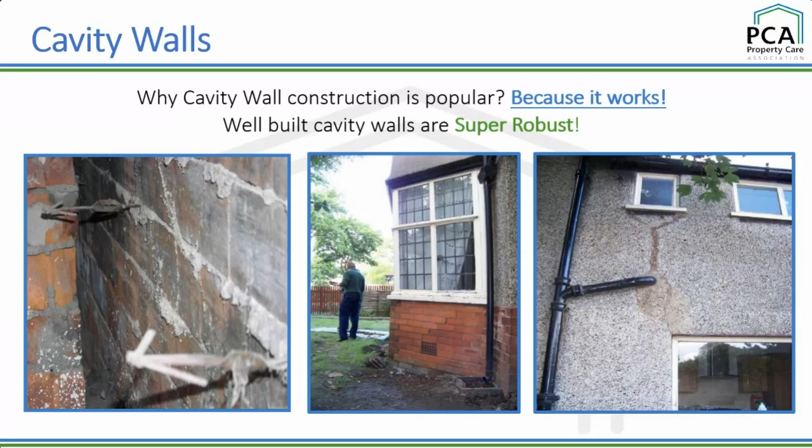But despite all of that, it was dry on the inside. And that's because cavity wall construction is super robust. It really does work. It's fantastic. It's stood the test of time. And I believe it is the Garden Village. Yes, well spotted. But more curiously, has anyone seen these types of tie before? Very unusual. But rat trap we'll get onto in a minute, Les, so don't you worry about that.

But moving on, I've said that we've been using cavity wall as our primary form of construction for the last 100 years. But what's the earliest examples that you guys are aware of? This is throwing it open to conversation in the comments section, really. So what's the earliest example that you know of, that you've heard of? Let's have some comments coming in. We certainly know there's some examples before the 1920s.

Is there a delay on the comment section here? No one wants to talk to me this morning. Well, come on. 1900, yeah, okay. Yeah, just to let you know, James, I think there's just a wee bit of a lag. 1870s. There we are. We've got a few coming in now.

Real County, 1819, 1890. Yeah, so we're all in that sort of similar ballpark, aren't we?

1890. Well, I'm going to talk about my good mate, Marcus Vitruvius Pollio. A bit of a cruel question, because I don't suppose many of us look at Roman architecture on a daily basis. But my mate Vitruvius, and you'll start to realise I'm a bit of a fanboy for him, he was just a bit of an all-round genius. Military commander, Roman architect, and he wrote this, the Ten Books on Architecture.

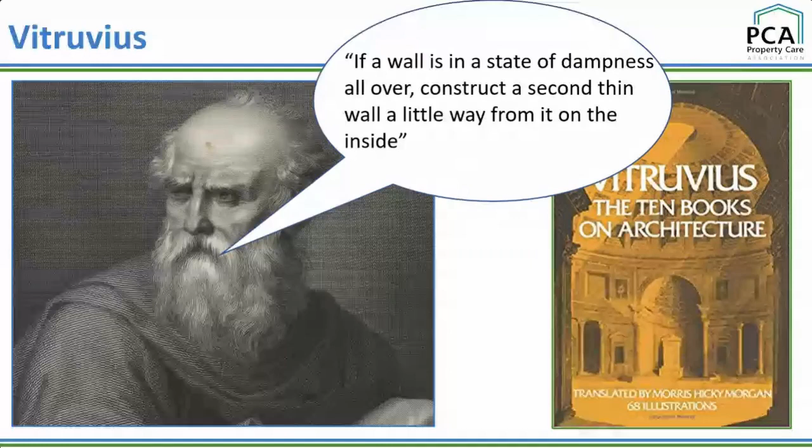So, didn't take long to carry on. Just a quick word to the wise, really, and I know Les has mentioned it previously.

Identification of cavity walls. It might seem obvious if you've got a stretcher bond, it'd be fairly straightforward - you're either at 4.5 or you've got a cavity wall. But don't be deceived, particularly with headers, for several reasons. So you've got that diagram in the bottom right corner there.

That's from Gwilt's Encyclopedia of Architecture from 1899. You can see you've got these quite ornate type bricks used for an early form of tie, essentially to keep those two leaves together. But from the outside, you would be quite easily forgiven for thinking it was a solid wall. Same with the one on the left.

This is actually from the London bylaws in the 1920s. What that advocates is building essentially a solid wall, having the cavity behind that, and then having a 4.5-inch leaf behind that. So ultimately, don't be deceived by headers. The best way of always checking is to do the measuring - check the depth of the wall.

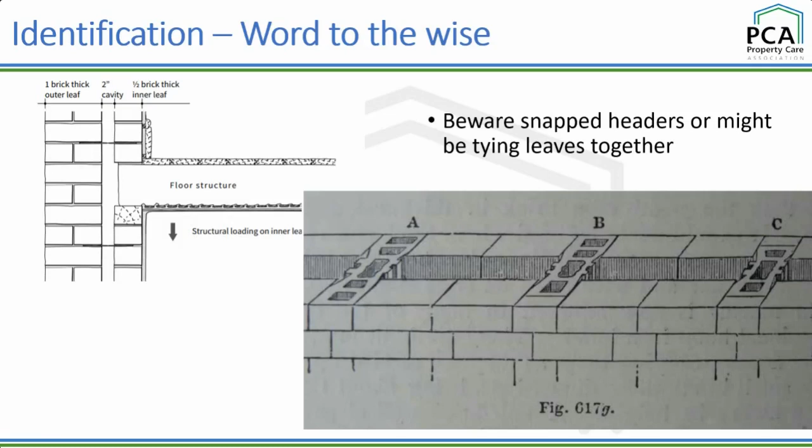You know, don't want to teach Granny to suck eggs. John's mentioned that, yeah, quite often comes about, and it was advocated in the London bylaws, so that's why - make sure you measure. Absolutely, it's a gospel way, you've got to do it. So that's a bit of context, a bit of what we're looking at, bit on cavity walls.

But that happened due to one small omission, and the one small omission on that was it omitted wall ties. No wall ties had been put into that wall. If you think about it, that's due to the slenderness of a 4.5-inch wall. If you put it up and it's not linked to the supporting structure where there's return walls or internal walls to strengthen it, there is very little strength there.

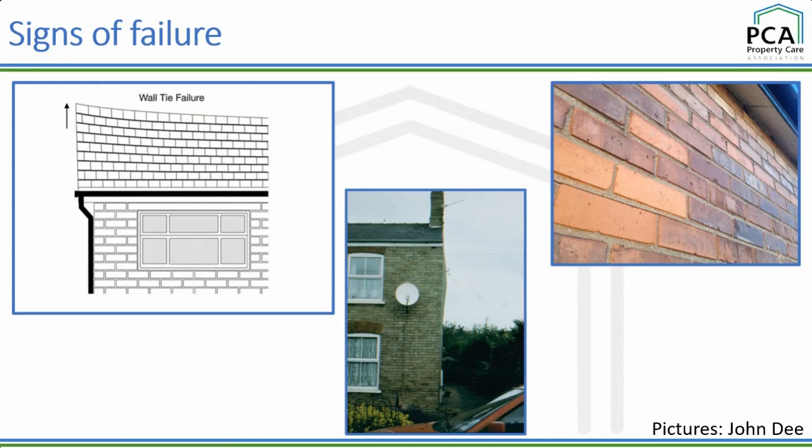One thing I also wanted to touch on, which I did allude to briefly when we did the damp control webinar a couple of weeks ago, is you've got all these ties, and if you look at the design of all these ties, they've all got one feature on them, which is some form of damp control. You've either got the rubber beads, or the twist, something there to drip water, to make sure water does not run across that tie from the outer leaf to the inner leaf and dampness manifests itself internally. It's meant to be dropping water into the cavity.

So there is some form of water control - the cavity is there for water control essentially, and that feature is there for it to discharge water into the void.

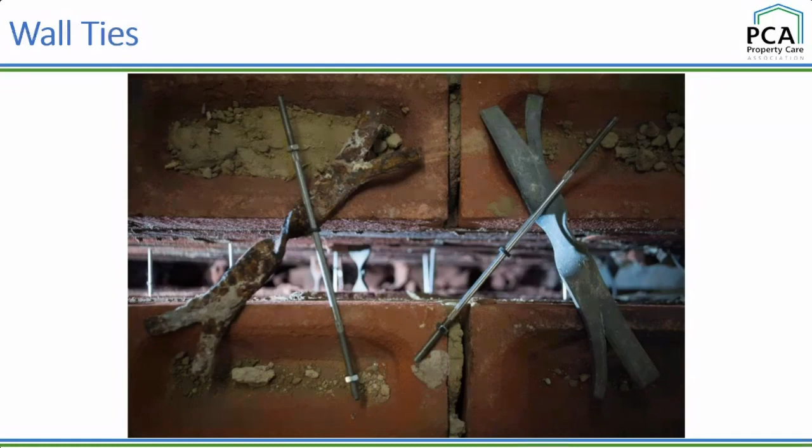So I think cavity trays are another form of moisture control within cavities that are often overlooked and can be responsible for moisture building up if not looked at properly.

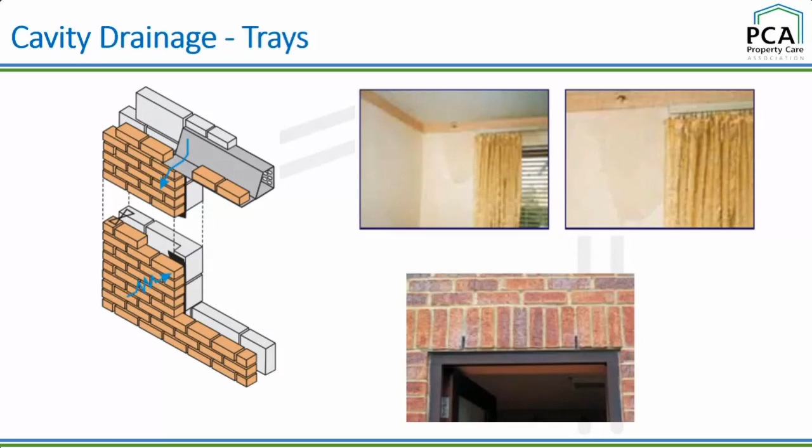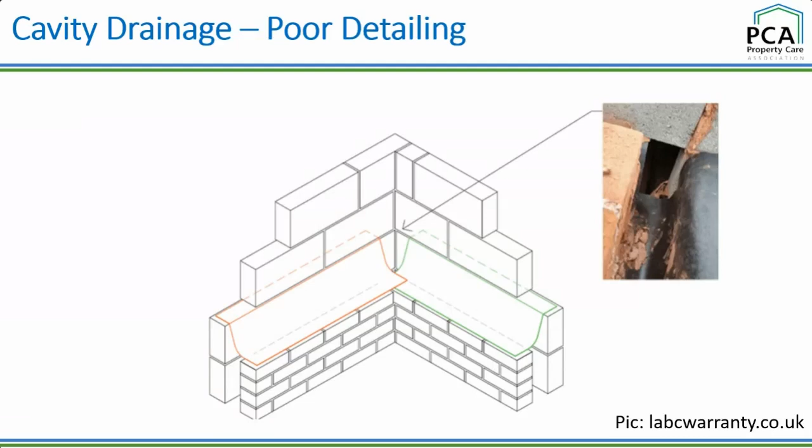And again, that's from LABC documents as well. So talking about window openings, things like that - lintels, another important thing.

You've got a lintel that's straddled across the cavity. It's naturally going to be a few degrees colder as well. So if you're doing your survey, you've got to bear in mind that you've got an inherent defect there.

So if you're out there doing your survey and you're lucky enough to have a thermal imaging camera, you should be able to pick up on something like this if you've got a concrete lintel going across the two. But if not, you can still do similar things with a simple surface thermometer and check above window lintels for temperature differentials to see if there's an inherent built-in defect there as well.

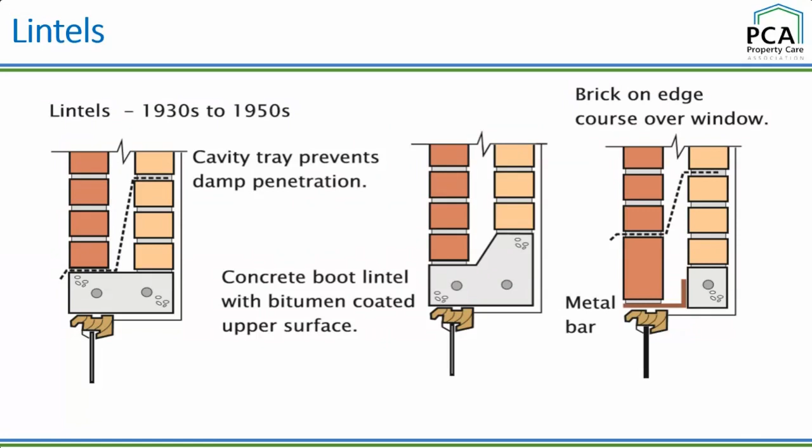So that's a brief overview on inherent design features. Let's jump forward a few slides. So that's a lot about the inherent defects within the structures, as it were.

But what we've also got to bear in mind is that we've also changed a lot of our construction as well, particularly cavity walls. And I'm going to put a big caveat in here, because you get quite a few people that are quite anti-cavity wall insulation, and I don't see myself sitting in that camp by any means. Actually, I think there is a huge move towards being more carbon neutral at the moment, and I think rightly so, and that's something we need to embrace.

But part of embracing that, if we're ever to get anywhere near our carbon neutral aspirations, we need to look at our existing housing stock. Now, our existing housing stock is quite old - the vast majority of it, over 85%, is over 20 years old. And that needs to be improved in terms of thermal efficiency. Cavity wall insulation provides one of the most cost-effective ways of improving the thermal efficiency of a building.

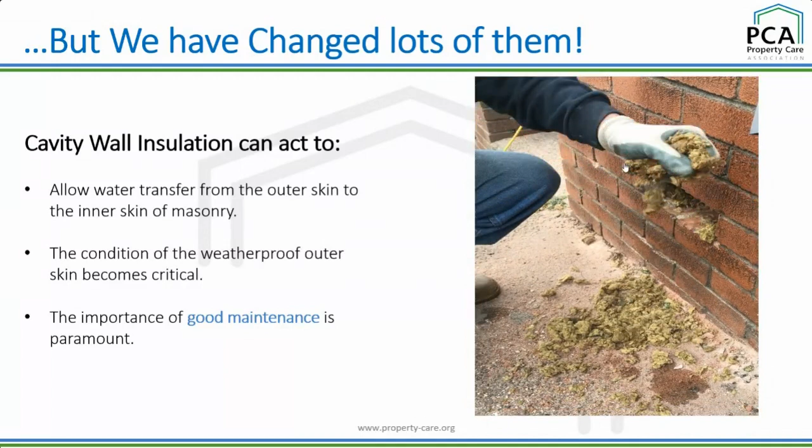Now, hopefully you should have another little video now. So this is a result of a gutter leak. If you start looking at this, what's the cost of a routine gutter leak? Hopefully it should be picked up as part of your routine maintenance. If you're doing your routine maintenance, you should be checking your guttering once a year or whatever, and hopefully the cost of that repair should be free. But in this instance...

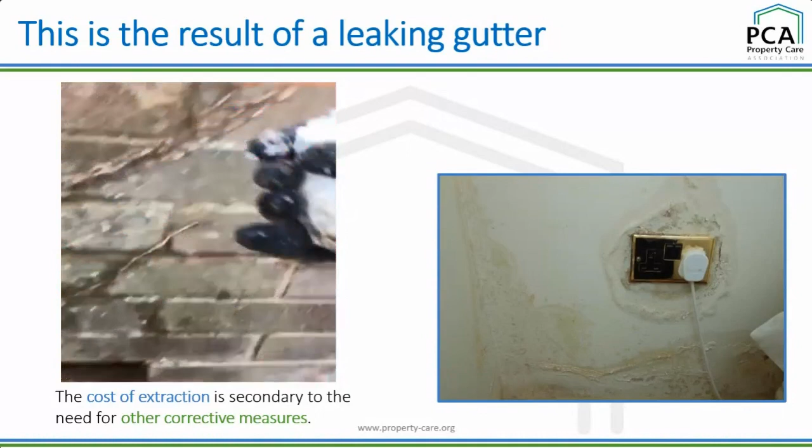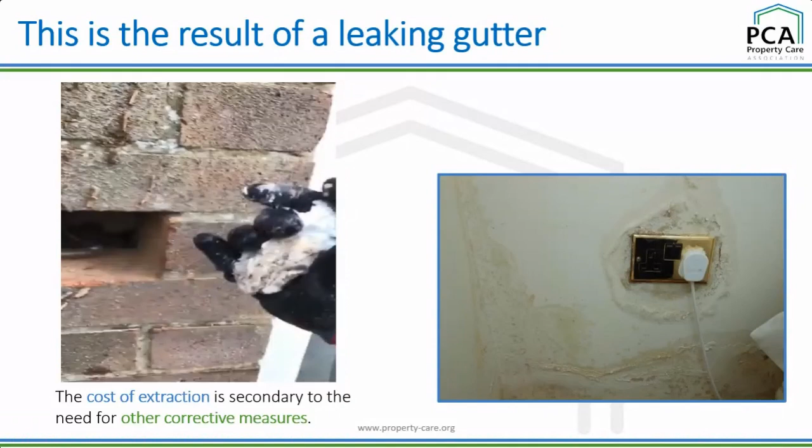You've got to start considering the cost of the extraction of the insulation material. You've then got to start looking at the cost of the replastering as a result of that. You're also then going to need an electrician to check out any of the electrics to make sure they're still safe and sound. You would then need to consider any built-in timbers as well, so there's an extra trade there, and probably a plasterer is going to need to come in as well - another trade. And then you've got your wall ties that may potentially have been affected as well. So something that ultimately should have been picked up during routine maintenance and would hopefully essentially be a free fix - the cost has gone up exponentially. This is why it's fundamentally important to appreciate that cavity wall insulation will change the way that wall works, and the importance of good maintenance.

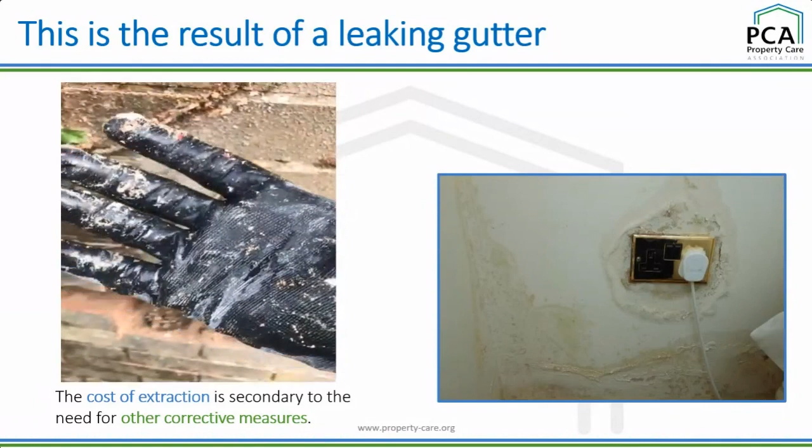So that's where the majority of claims come from.

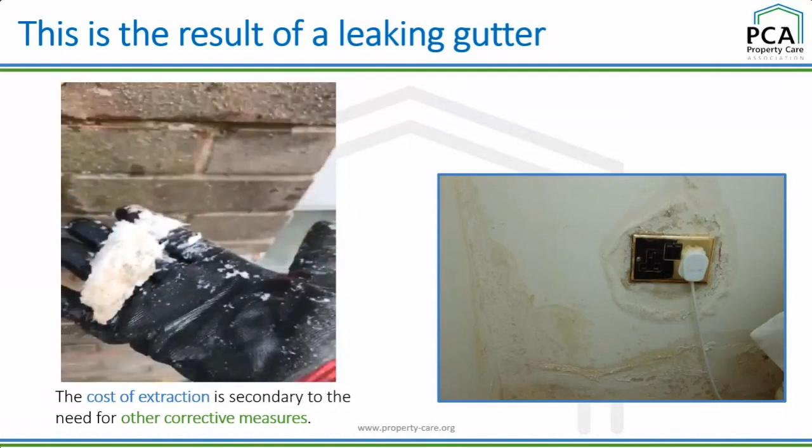But how would you distinguish between rainwater penetration and internal condensation and mold growth problems? For my mind, the only way you're really going to get a positive diagnosis is you could try an endoscope, but I don't think you'll tell much from physical appearance. I think you need to do what's happened in this instance, and remove a brick to get your hands on some insulation. If the insulation has got wet through rainwater penetration, you're going to see it's wet, you're going to see there's some problems.

Just a bit on the main types of cavity wall insulation then. You've got your expanded polystyrene, which you can see there, and then you've got your mineral wool as well. They're your two main types that you're likely to come across.

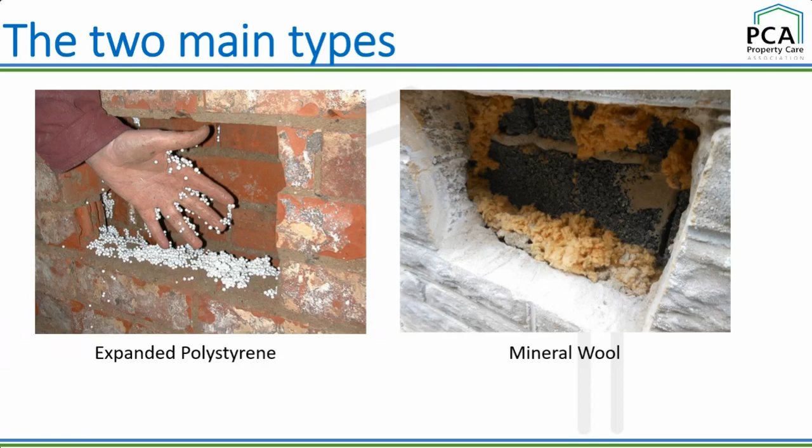Both will allow moisture to get across the void. Mineral wool will act more like a sponge, and for my mind, it will hold more moisture. The other thing you've got to bear in mind with mineral wool is that once it gets wet, it's going to get heavier. When it gets heavier, it's going to drop. When it drops, not only are you going to lose any thermal benefits that insulation would provide, but it's also got the potential to cause problems with continuity of the insulation. There's going to be cold bridges potentially where there's voids and missing gaps.

The third type is urea formaldehyde. You're less likely to find this essentially expanding foam, which gets injected into a cavity. This should only be used in really sheltered areas. I'm not a huge fan of this, but ultimately it seems to break down over time anyway, and then you're going to lose your thermal benefits. Imagine if you realise it's gone into an inappropriate property within the first few years - how are you ever going to get that stuff out? The job of removing that stuff is going to be quite some pain.

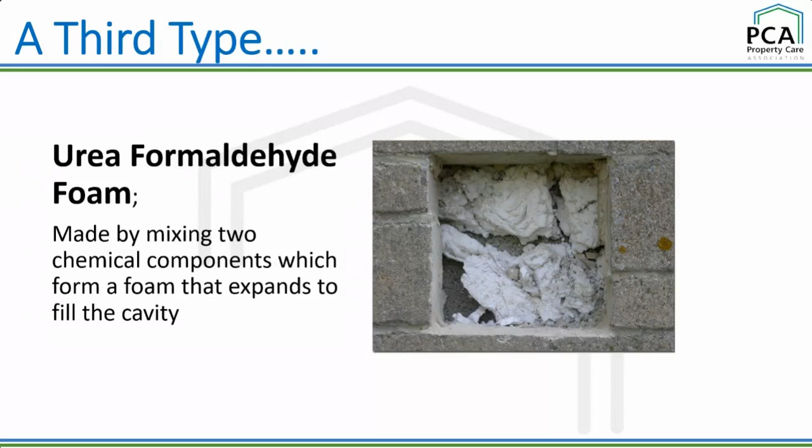I'm going to go back to cavity wall ties now. I think cavity wall insulation has an impact on cavity wall ties. I briefly alluded to this when we spoke a couple of weeks ago on the last webinar. But as I say, all of these wall ties are built with an inherent drip feature to allow them to discharge water into that cavity over time.

We also know all galvanized wall ties have a life expectancy. That will vary depending on location, but they will need replacing at some point. According to BRE, they say they probably will need replacing at some point within their life. So if you've got a property where you've got CWI in there as well, and you've got your wall ties, how is that drip feature actually going to work? How is it going to be able to discharge water when it's got the insulation around that? I think that's going to hinder that process.

I also think you need to start looking a bit more at context as well. We know if we've got a property between 1964 and 1981, standards of galvanization were reduced. So if you're looking at a property of that era, as a surveyor, do we have a duty of care to say, ultimately, you should be inspecting your wall ties on a more frequent basis? We should be suggesting that they're checked anyway. They do have a shelf life, they're not expected to last forever, they have a life expectancy.

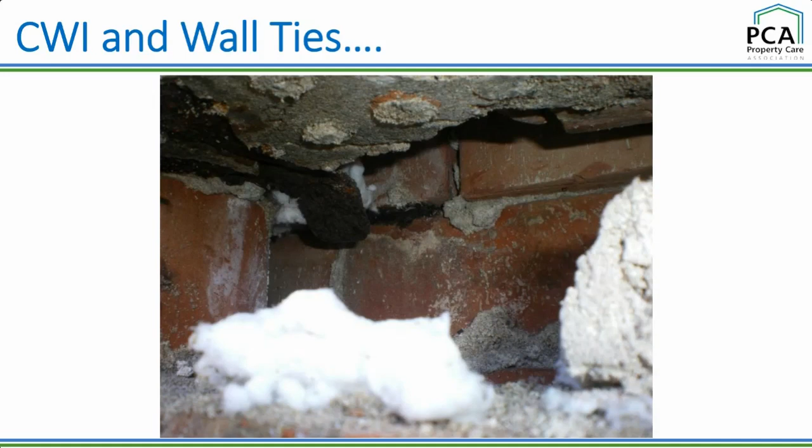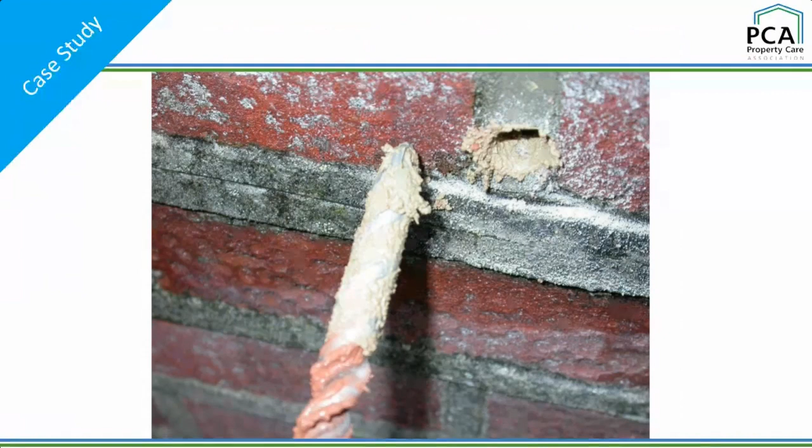So another little case study now. This is a 1970s bungalow in Wimborne, not particularly exposed by any means, quite sheltered by the neighbouring property. And judging by the satellite dish, it's probably a southerly elevation as well. So this is a drill got into one of the mortar joints. You can see that external face is absolutely saturated there. And you can see the hole, you can see some of the insulation.

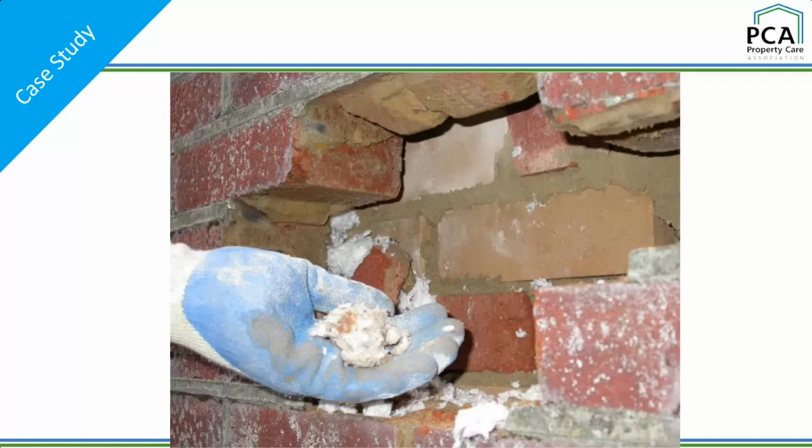Now, I know there's going to be a few people that are probably going to be straight on the bandwagon and blame the cavity wall insulation: the insulation should never have been put in. This is where I think of things a bit differently. You can see on this one, it looks like someone's come along and done some repointing there, in some pretty dense cement render as well, which I think is going to hinder that wall's ability to dry. And I think that's illustrated even more so when they've taken away that render, and you can see how soft the mortar is behind it.

So to my mind, whilst there'll be a lot of people that are quick to blame cavity wall insulation in this instance, I think actually there were alterations to the wall that probably had more of an impact as well. So I don't think it's just the CWI installation. In this instance, I think there are numerous factors that have caused that.

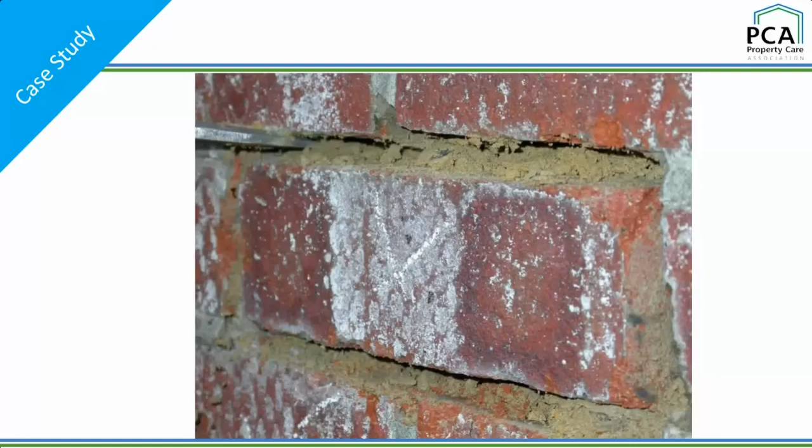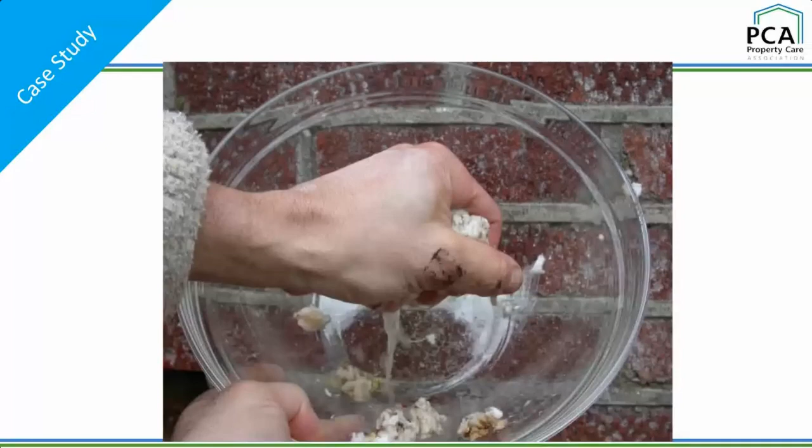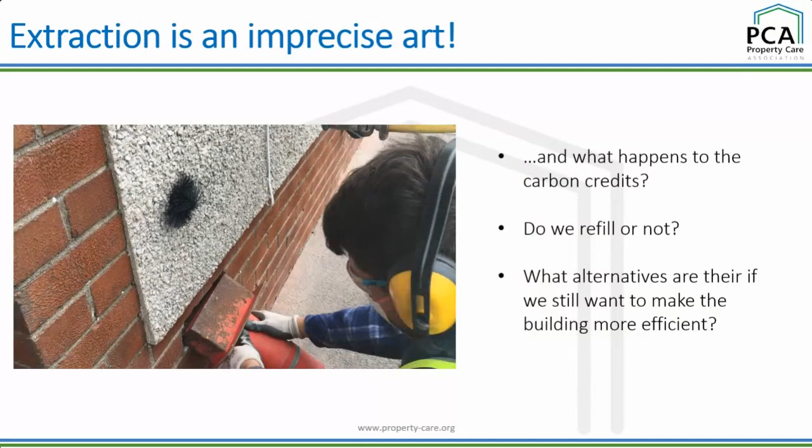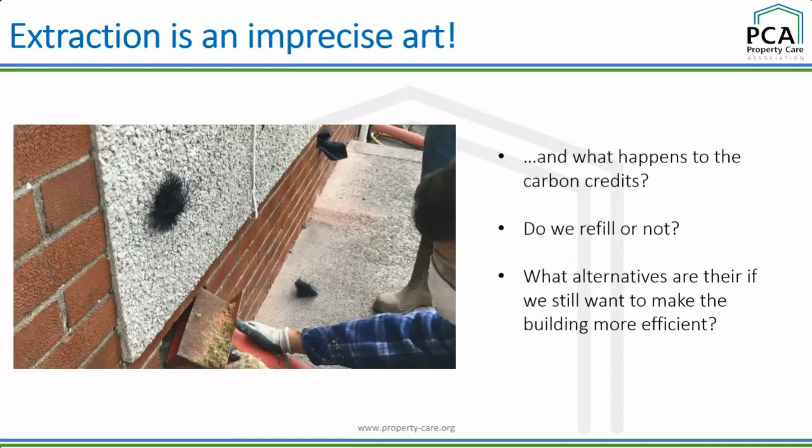Cavity wall extraction: we like to include this little video, because a lot of people wonder how cavity wall extraction takes place. Well, essentially, you get two guys, one with an air lance and one with a great big hoover, and they come along. The little black sea anemone things are used there to fill the existing holes when it's blown out. You can also see where he sticks that lance in and the amount of debris that comes out of that cavity as well. But we'll get onto that in a bit more detail in a short while.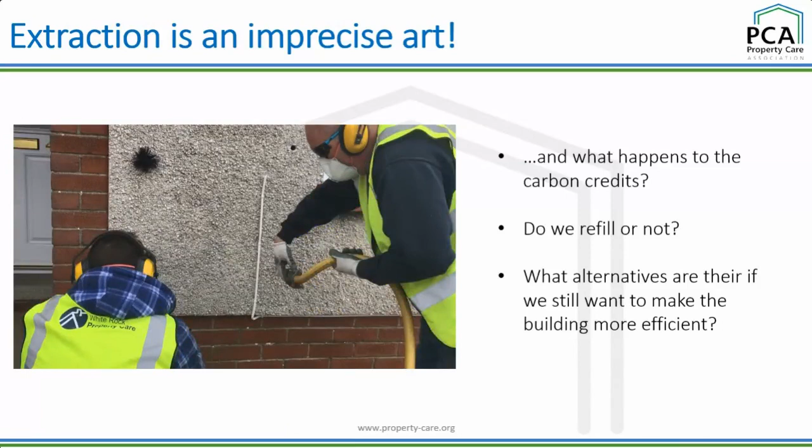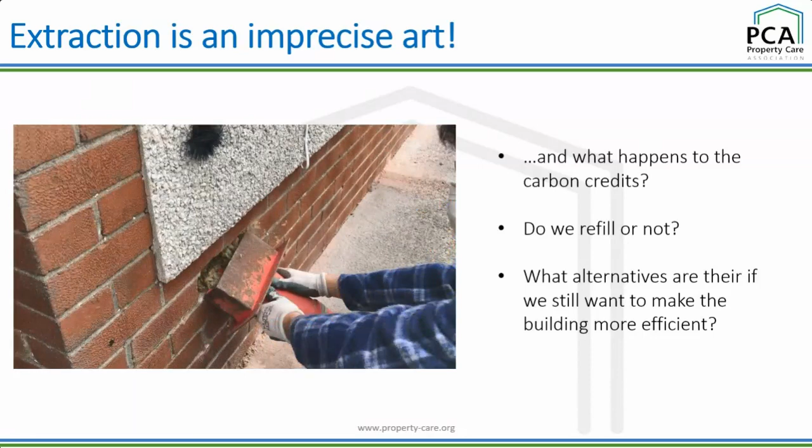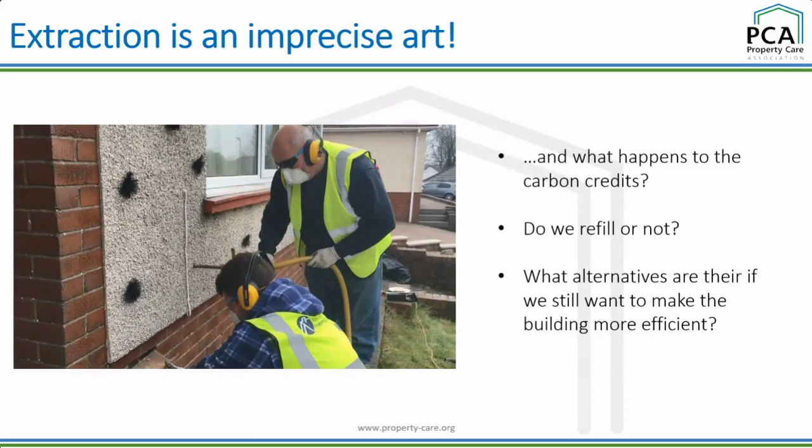The other thing to consider: the reason for cavity wall insulation is it's all about providing thermal benefits and becoming more carbon neutral. Once it's gone in, that's fine, and there's a benefit. But if it has to come out, if it's got wet and it's going to come out in this instance, what's happened to all the carbon benefits? The amount of time, effort, and work. This stuff that's going to come out, where's it going to end up? It's probably going to end up in a landfill somewhere, and that can't be particularly carbon friendly.

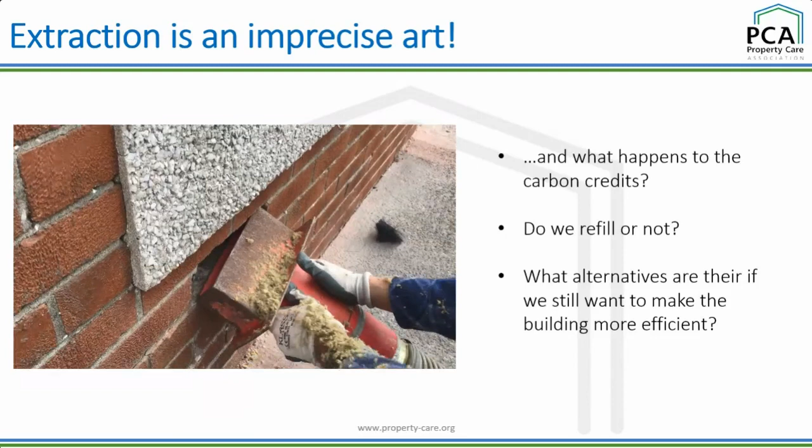And if they're not sleeved and not isolated to continue to allow air to flow through, then you're going to restrict it and you're going to end up with timber decay for the floor. So as part of the surveys, if you're looking at cavity walls, I think you should always take a prod just to check that the air bricks aren't blocked.

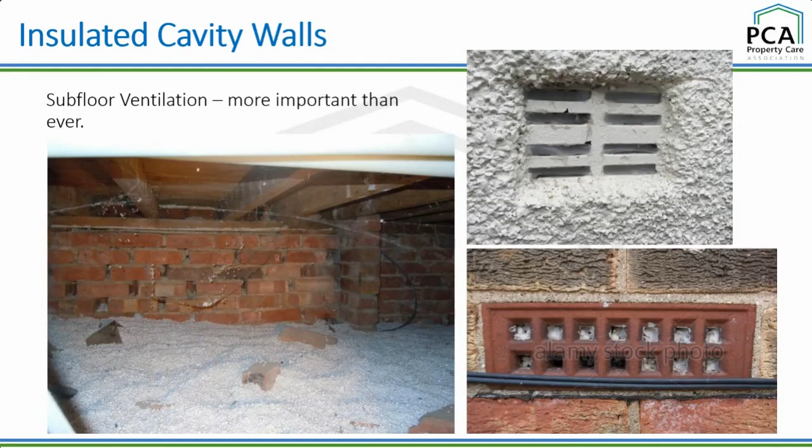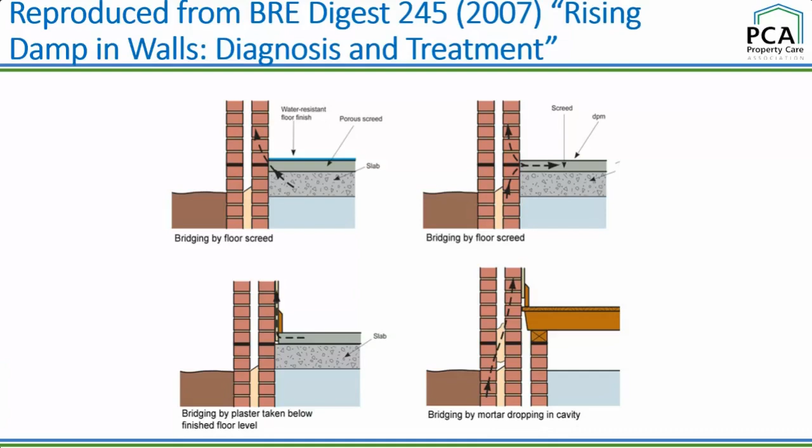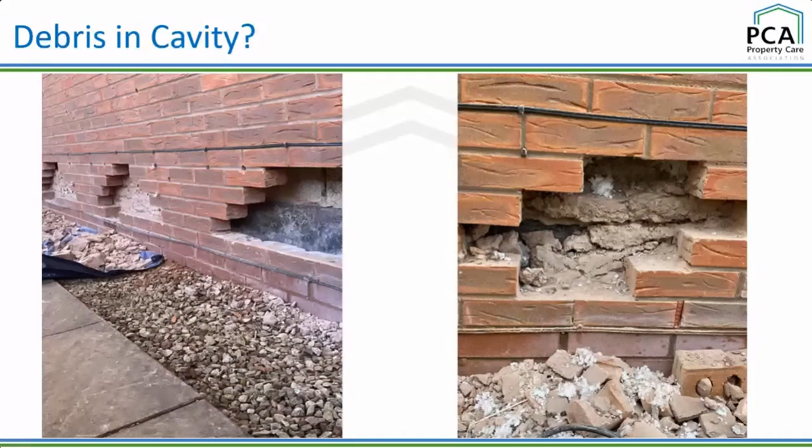So huge problems potentially with debris in the cavity. I think it's not one to be underestimated and should always be looked at, regardless of the age of the property. And what about remediation? If you look at this job here, there is a significant amount of work that needs doing there. The answer there is not new DPCs or anything like that. The answer there is removal of that debris. And it's quite a laborious job. But there is a good amount of work that needs to be done there. And that's always going to be a more permanent fix as well.

So I appreciate this has been a bit of a whistle-stop tour. There's a whole lot more we could have gone into with regards to condensation, lintels, crack stitching, lintel repairs, that sort of thing. There's a huge depth of information we could go into with regards to defects in cavity walls, but I appreciate we've been going on for a little while.